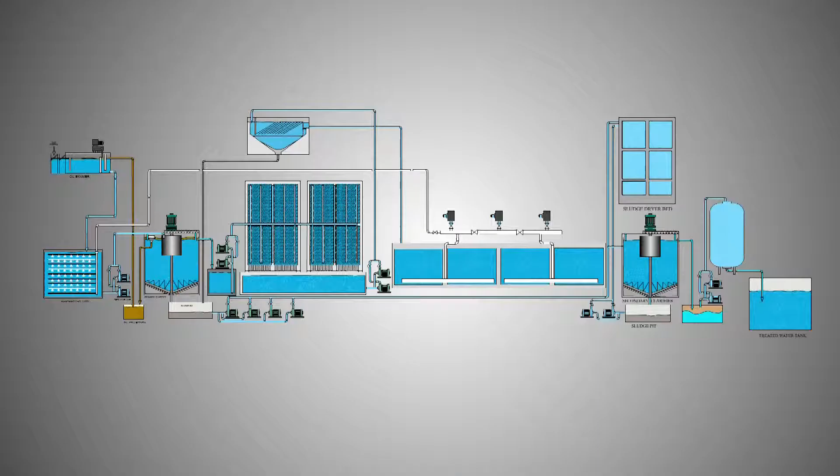Tirupati Engineers, a leading effluent treatment plant provider, has been offering manifold innovative solutions to its number of prestigious clients across the country. Established in 1990 by a visionary technocrat, Mr Gandhi, today Tirupati Engineers is at the forefront in the field of establishing viable effluent treatment plant facilities.

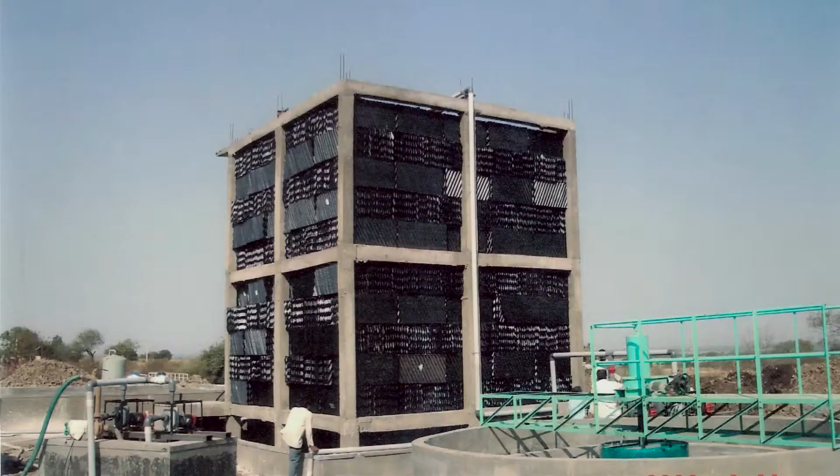The plants installed at various cooperative sugar factories, MIDCs and municipal corporations can vouch for Tirupati Engineers' commitment for values of innovation and customer satisfaction. The effluent treatment plants with bio-towers at Dr. Babasaheb Ambedkar Sahakari Sakhar Karkhana in Osmanabad, at Shri Jnaneshwar Sahakari Sakhar Karkhana in Ahmednagar and at Mazalgaon Sahakari Sakhar Karkhana in Beed are the flag bearers of the new paradigm shift in the field.

Besides, Tirupati Engineers has also carried out plenty of upgrades across the state of Maharashtra. Ajinkyatara Sahakari Sakhar Karkhana, Sahyadri Sahakari Sakhar Karkhana, Krishna Sahakari Sakhar Karkhana in Satara, Sonhira Sahakari Sakhar Karkhana and Hutatma Sahakari Sakhar Karkhana in Sangli, Dudganga, Vedganga Sahakari Sakhar Karkhana and Reliable Sugar Private Limited in Kolhapur are just few

of its proud clients. Not just the cooperative sector, but municipal corporations of Pune, Panvel and Raigad and corporates like Aqua Chemicals in Vadodara too are availing the benefits of the plants installed by Tirupati Engineers.

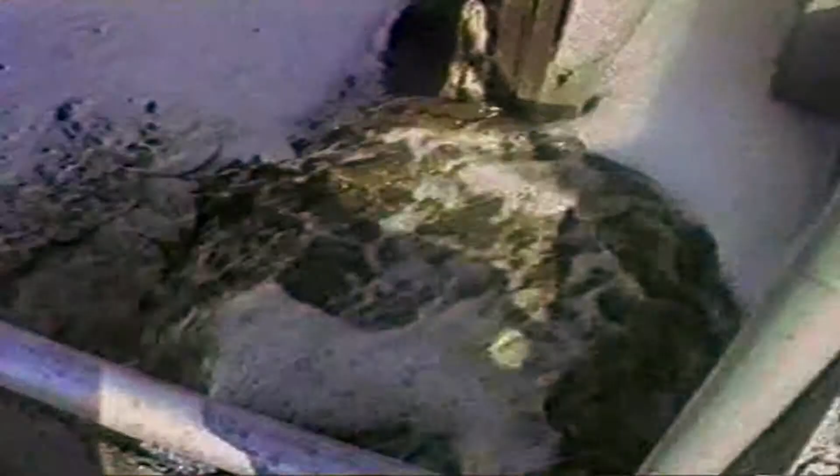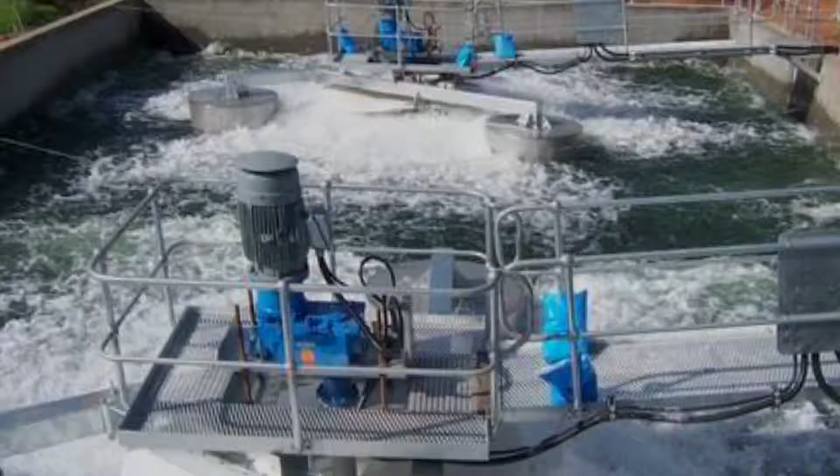As we know, the industrial effluent has always been a huge threat to the life surrounding the respective industrial plant. Safe, secure and standardized recycling of the effluent has always been a prime concern of all the managements. Conventional and widely accepted diffused aeration processes become ineffective when the load becomes inconsistent.

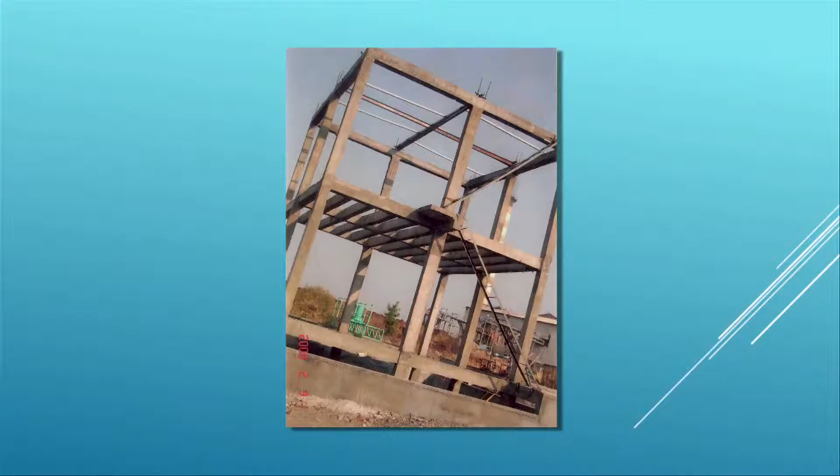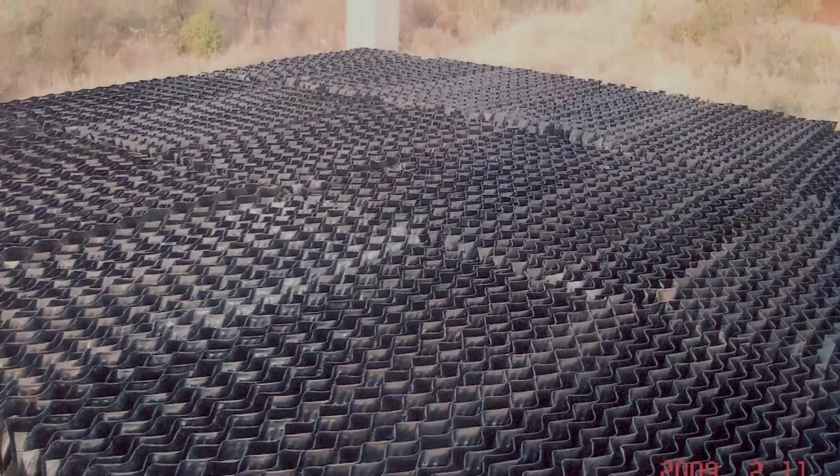To overcome the restraints of the conventional system, Tirupati Engineers has designed and developed an indigenous and cutting-edge system called Bio-Tower. This state-of-the-art system can reduce the biological oxygen demand and chemical oxygen demand level as much as to 60%. The high-quality PVC fill media, also called as Bio-Tower, is used in effluent treatment application.

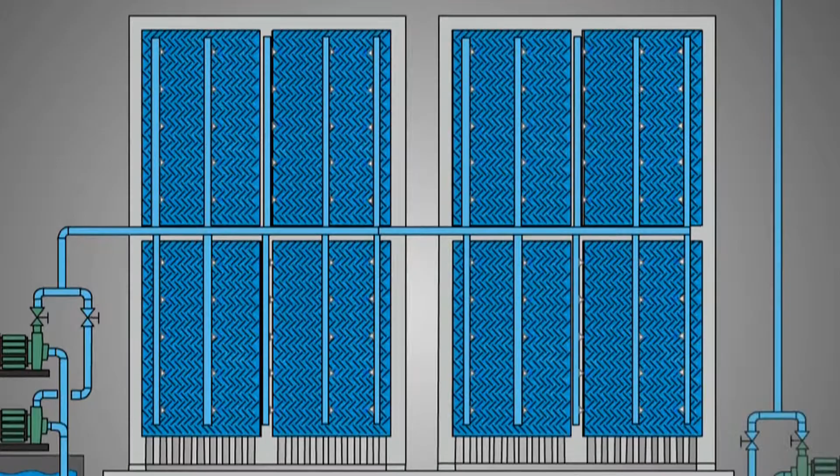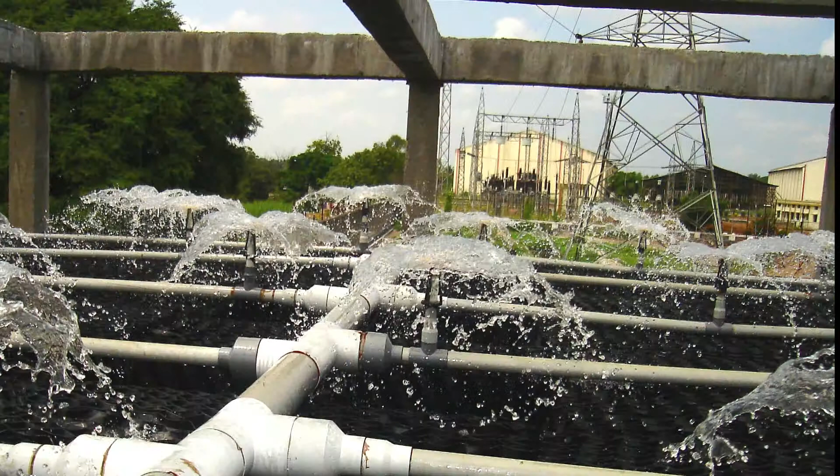The trickling filters used in the Bio-Tower create maximum surface area in limited space. Very high surface area, chemical and weather resistance and easy installation process are just few of the interesting facets of the Bio-Tower. The Bio-Tower offers various technical improvements such as solids contact, ventilation and utilization of plastic media.

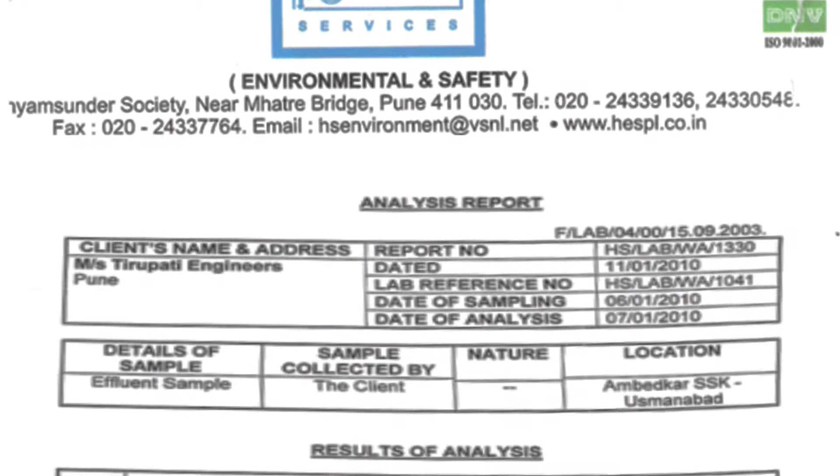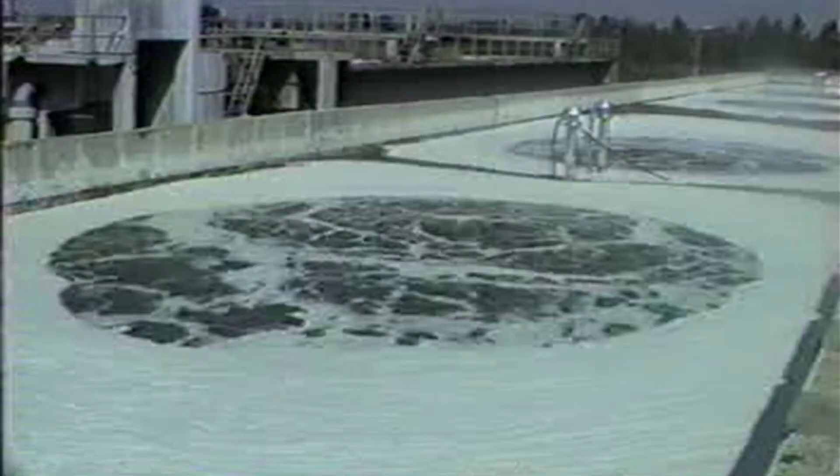Assessments carried out at treatment plants where Bio-Tower was installed prove that Bio-Tower is the most viable solution to a multitude of effluent treatment problems. Besides saving cost, the existing plants will have manifold advantages once they substitute it with Bio-Tower. Once you install the system with the Bio-Tower, maintenance of the system is almost negligible compared to conventional ETP systems.

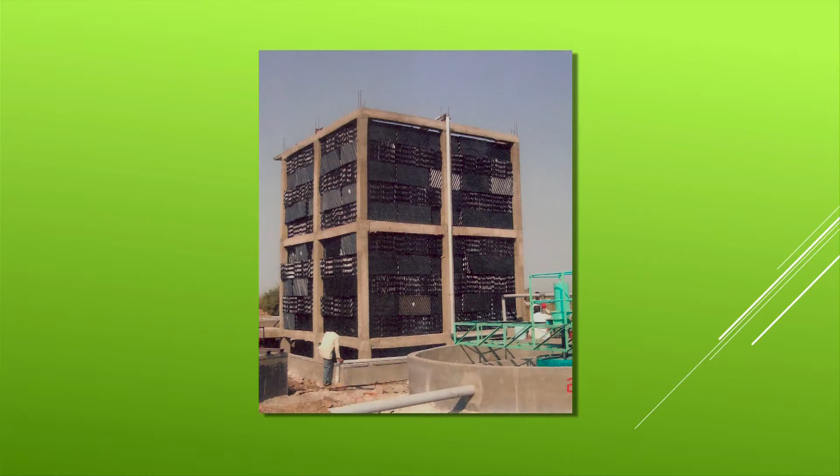The minimum life expectancy of any tower is more than a decade. Compared to other upcoming techniques like reactors and biodigesters, the investment cost for Bio-Tower is very low. Certainly, Bio-Tower is emerging as the prime choice of all the decision makers as its power consumption is just 5 to 7% compared to other systems.

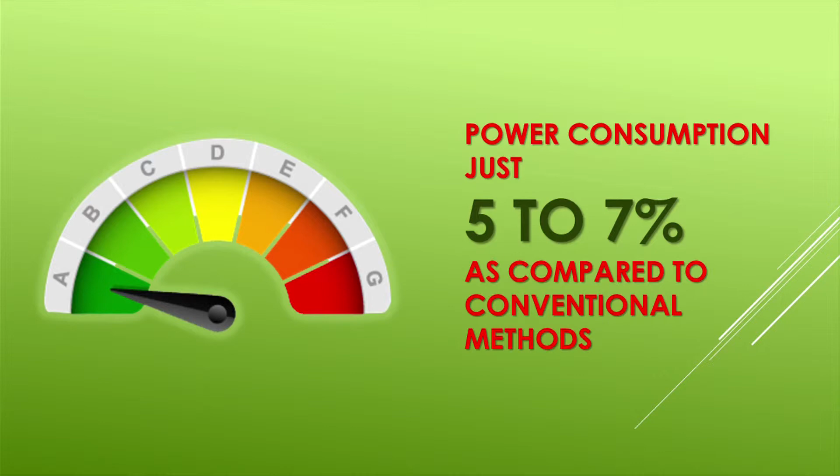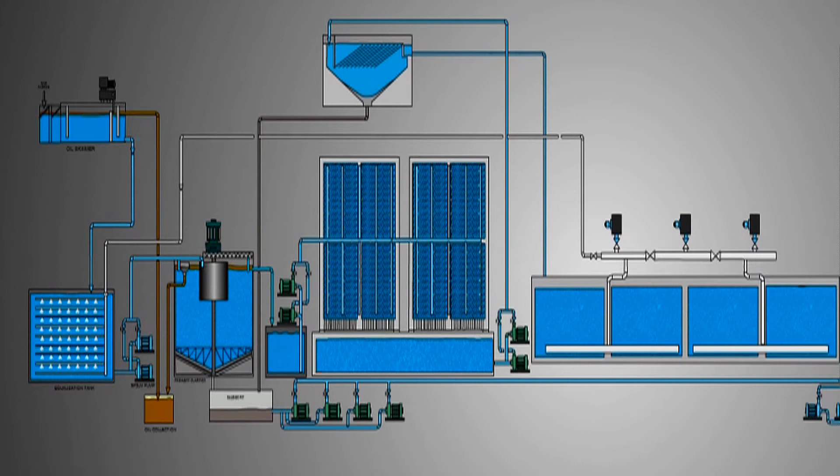With Pollution Control Board's norms becoming stricter, installation of Bio-Tower is certainly the need of the hour. Time has come to adapt to new change, embrace new possibilities and translate our environmental concerns into sustainable solutions, with Tirupati Engineers and its innovative solution of Bio-Tower.